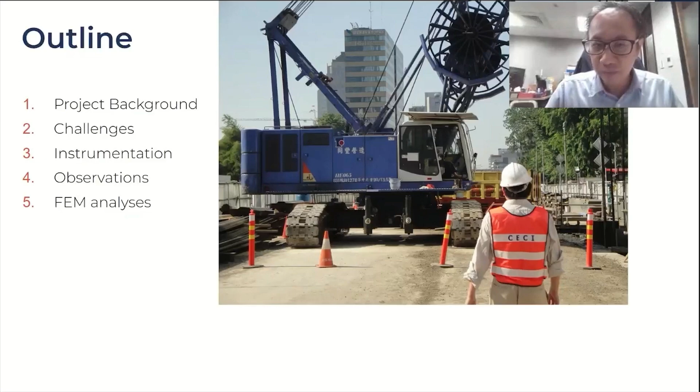Now I want to very briefly explain the project background. Here you can see some photos which I took from the research project we have.

This is an excavation for underground stations in phase 1 of the Jakarta MRT North-South line, which has 6 underground stations. The station we talk about, called Bunderan HI, is one of those 6.

This Bunderan HI station is just beneath this roundabout. It's located in Bunderan HI at central Jakarta in Indonesia, and it's one of 6 underground stations in phase 1 of the north-south line of the Jakarta MRT.

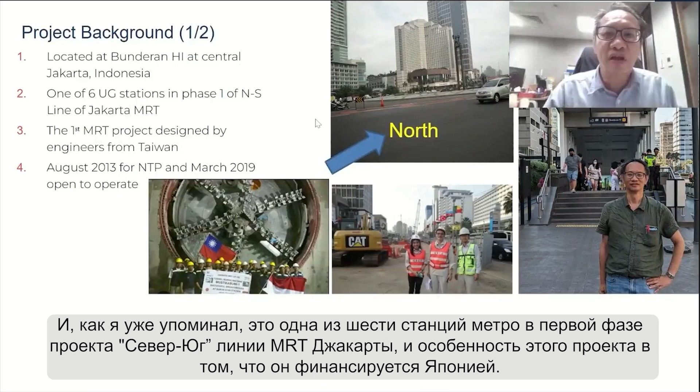A very special thing is this project is a Japan-funded project, but in addition to the tier 1 contractor which must be Japanese, there's local Indonesian contractors. Many subcontractors or even the consultant actually come from Taiwan, so this is the first MRT project designed by engineers from Taiwan.

That's the reason why, when we had a TBM breakthrough, we could raise our national flag together with the national flag of the Republic of Indonesia, because we did have many Taiwanese engineers working there for this project. That's me, that's my client Mr. Moda from the contractor side, and my assistant engineer.

The whole project started design from August 2013, the so-called notice to proceed (NTP), and in March 2019 the whole project opened to operate. This was a photo I took last year, 2023, at the entrance of the Bunderan HI station. You can see now it is in operation.

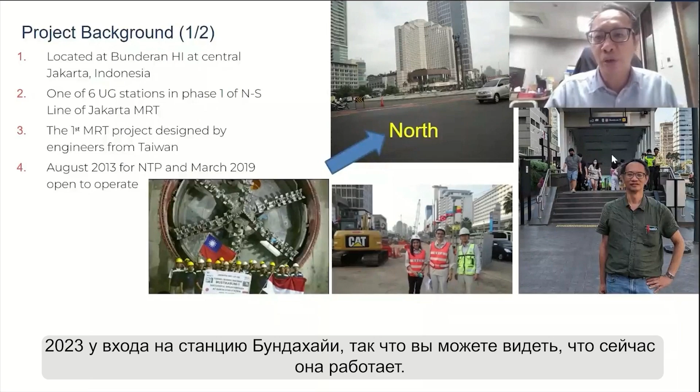I'll continue to give some further information about the project. As you can see from the photos, this excavation has 2 parts. The length of the excavation was 430 meters, and the width is around 22 to 30 meters in different sections, including 1 crossover tunnel and 1 underground station.

For the excavation, as you can see from the cross section of the ground profile, we used the so-called top-down method, which means we have a retaining structure, and once we excavate, we simultaneously cast the concrete slab to make horizontal supports. So the whole excavation was done in 5 excavation stages, supported by 4 levels of reinforced concrete slab with various thickness.

The maximum excavation depth is around 18 to almost 19 meters, and the excavation pit was retained using a 1 meter thick and 24.1 meter deep diaphragm wall.

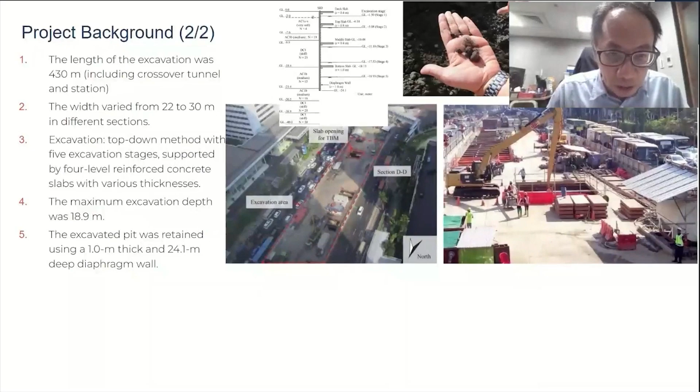The interesting thing, if you look at the ground profile, is it's mostly clay. One thing you may note is the penetration depth of the wall is comparatively shorter, only about 5 meters. The main reason is we realized the soil is quite stiff, so that's why we could have a comparatively short wall for this excavation.

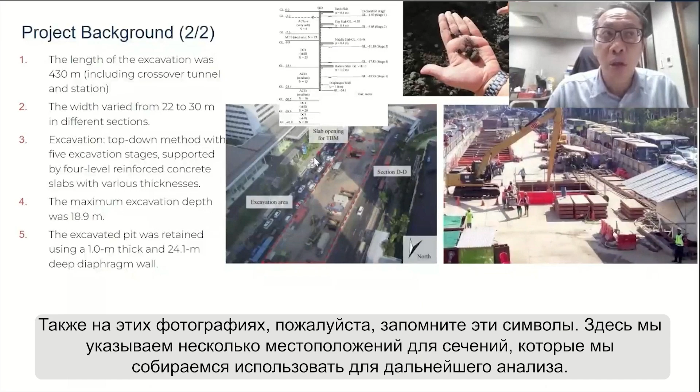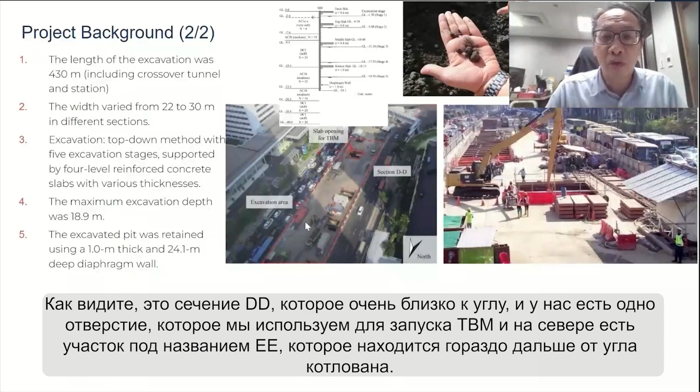Also from these photos, please remember these symbols. We indicate several locations for the sections which we are going to use for later analysis. As you can see, that's section DD, which is very close to the corner, and we have one opening which we use for the launch of the TBM. Going north, there's section EE, which is much further away from the corner of the excavation.

It's very important to prove what the behavior of the excavation looks like, and an important matter is what instrumentations you put on the project site.

Actually, I think the wording here should be challenges instead of instrumentation. The challenge in this case is that this was the first large underground excavation project in Jakarta, so there was no similar experience we could refer to in the same area, including absence of local knowledge and understanding of the soil information.

There's also reliability issues with data for both soil testing and monitoring. This is a result from a consolidation test, but I don't think the data here can tell you much, because as you can see, it only has a primary consolidation curve. It doesn't have the unload-reload curve, so you won't be able to interpret any swelling index to calculate the consolidation analysis.

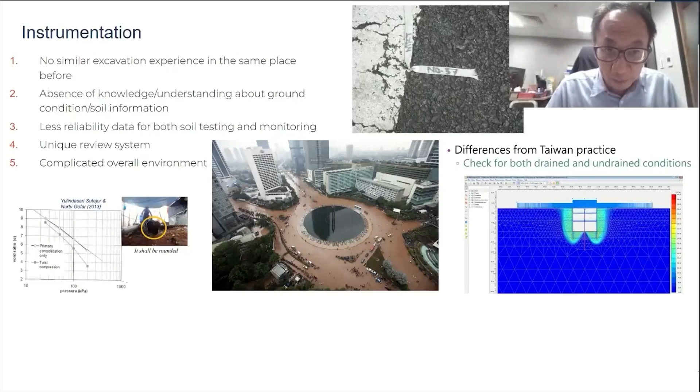You can also look at the samplers here. This is the tip of the sampler, and it should be a rounded one, but as you can see from the photos, it's completely twisted, which means the ground is much stiffer, but they just tried their own way to put the sampler in. This kind of twisted tip, we believe, caused a lot of sample disturbance, which could reduce the strength of the soils from the testing. So that's what we call the unreliable soil data.

And here shows the settlement nails which we found from the ground survey. As you can see, this kind of settlement nail system cannot give you very reliable data for surface settlement measurement. That's the reason why, in the end, when we did the feedback analysis, we tried to ignore all the settlement data and only took the wall deflection result to do the feedback analysis.

And it has a very unique review system, where the comments given by the review panel are not consistent with what we learned in the past, whether in theory or engineering practice.

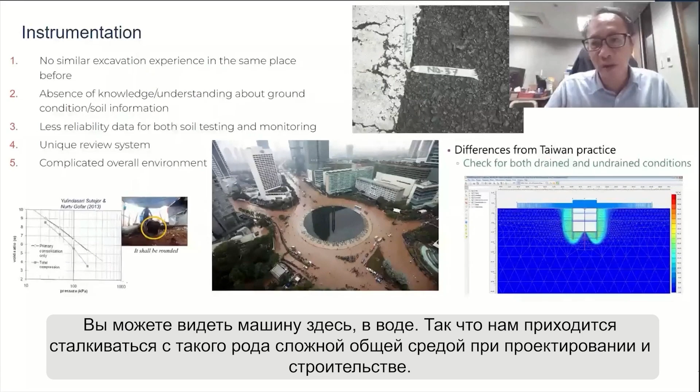Again, the very complicated overall environment we have to face is also a challenge to us. As you can see from the photo at the bottom center, that's the Bunderan area, and the whole area was flooded - you can see the car here is all in the water. So we have to face this kind of complicated overall environment when we do the design and construction. This indeed caused a challenge to us.

Now, the title here should actually be the instrumentations. The instrumentations we put here include inclinometers in the diaphragm wall, strain gauges in the diaphragm wall, strain gauges in the king post, and surface settlement nails on the ground behind the excavation, though I think the number is quite limited.

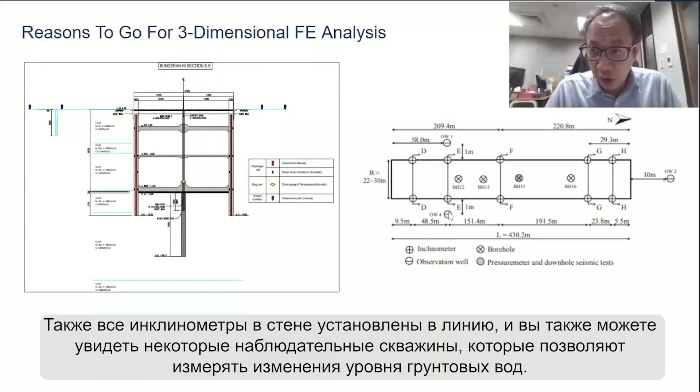This one on the right is the plan view. You can see the inclinometers in the DD section, EE section, FF, GG, and HH - totally 5 sections. The EE section is much further away, around 60 meters from the corner, and the DD section is much closer to the corner. The inclinometers in the wall are all in pairs, and you can also see some observation wells which measure the change of groundwater level.

Now I want to talk about what we saw from those observations, from the inclinometers. We first look at the inclinometer installed at section EE, around 60 meters from the corner of the excavation. Starting from the left, that's the first excavation, and the shape of the wall deflects like a cantilever mode. Gradually, once we excavate deeper and install the slabs, it changes to the propped mode, just like this. You can find the depth with the maximum wall deflection is more or less similar to the maximum excavation depth. The maximum wall deflection is around 16, I think - the red line here is around 16 to 17 millimeters.

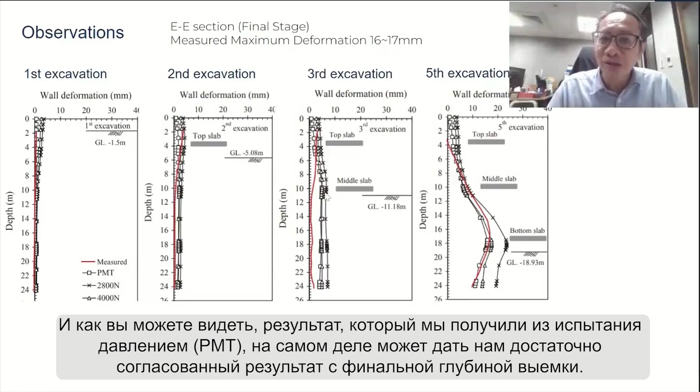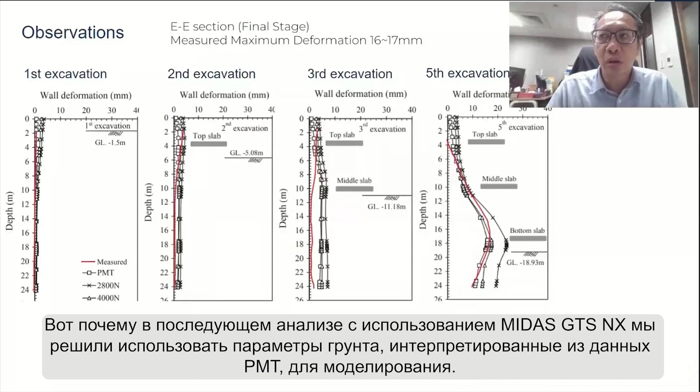Here we also tried some initial simulations based on different assumptions of soil parameters using other software, and then compared that with the observation data. As you can see, the result from the PMT, the pressure meter test, actually gives us a quite consistent result with the final excavation depth. That's the reason why, in later analysis using Midas GTS NX, we decided to use the soil parameters interpreted from the PMT for the simulations.

Okay, now we move into the finite element analysis, and that's we first talk about the models. Actually this model is only for an exercise purpose, so I personally will say this model is slightly, much bigger than what we expect.

Normally if the excavation length is only like 430 meters, we will add additional like 2 times of the maximum excavation depth, which will be like 40 meters each side, which should be enough. But we use much larger models to do the analysis this time. The length of the model is 1,000 meters, and the size 500 meters. But if you use a smaller size model, you can save the time you have for the analysis.

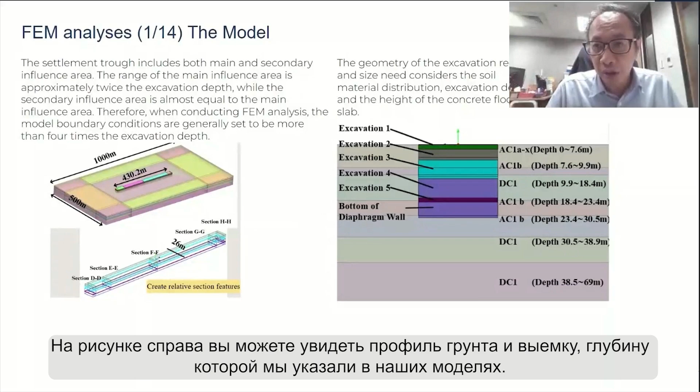We also mark where the sections which we are going to compare later on: D, D, E, E, F, F, and G, G, H here. And for the figure at the right, you can see the ground profile and the excavation depth which we put in our models.

Again, in midas GTS NX, it has a very special feature, which is different from others: we are eligible to manually define the mesh you are going to use, and then combine them together. We call that hybrid mesh. Normally in other similar software having similar functions, the mesh which you have mostly only has some limited options. But in midas GTS NX, you can manually change the size of mesh.

For example, we use several intervals of the mesh. Near the excavation area, we use a 1 meter interval to define the mesh size, because that's the area which we need to pay more attention to. But for the place far away from the excavation, we will use a much larger interval, like 15 meters, and then we combine these two sizes of mesh together. We use the hybrid mesh function in the software.

So that's the mesh which we have when we do the three-dimensional analysis using midas GTS NX, and that's a very special feature this software has.

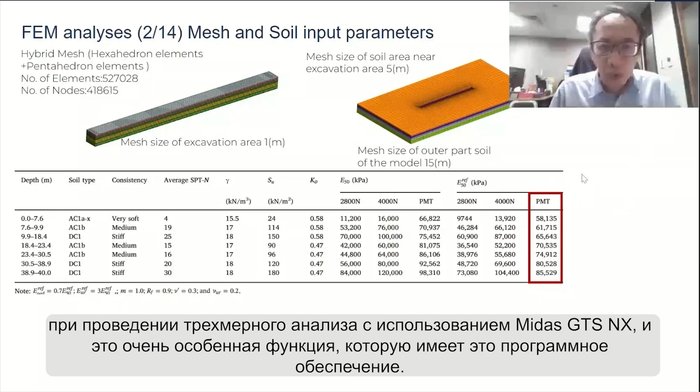We just mentioned we use the parameters from the pressuremeter test to do the simulations. Talking about the constitutive models which we use in these simulations, because this is a stress relief case for excavation, we choose a constitutive model in midas GTS NX called the modified Mohr-Coulomb model.

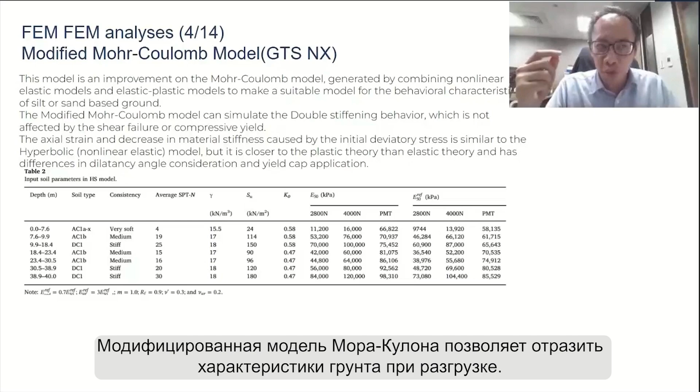The modified Mohr-Coulomb model is eligible to show the characteristic of the soil for stress relief, and this will be more similar to what we have in reality. These are the parameters we used for the analysis.

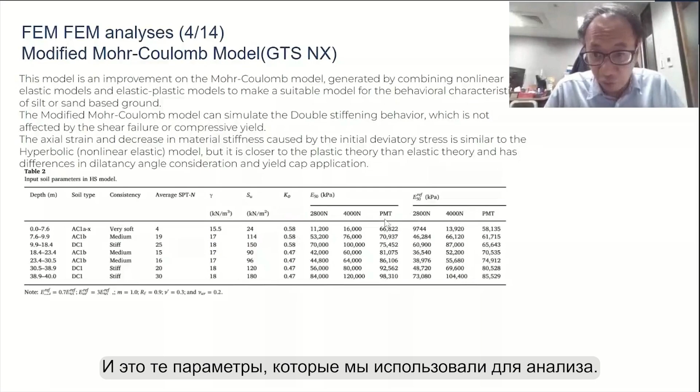After explaining the constitutive models which we use for the soils, we now move into the structural part. Because this is a top-down case, the structural members which we need to have in the excavation include the retaining wall, which is the reinforced concrete diaphragm wall, and the floor slab.

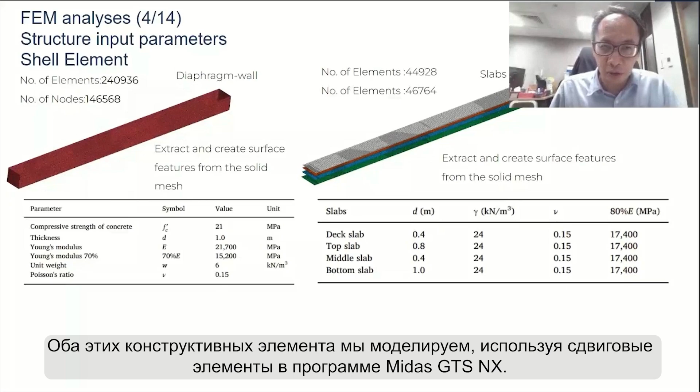Both structural members use the shell element in midas GTS NX. And for the shell element, because that's a kind of elastic material, what you need to give is basically the strength - the Young's modulus, unit weight, and the Poisson's ratio. That's what we use for the structural members.

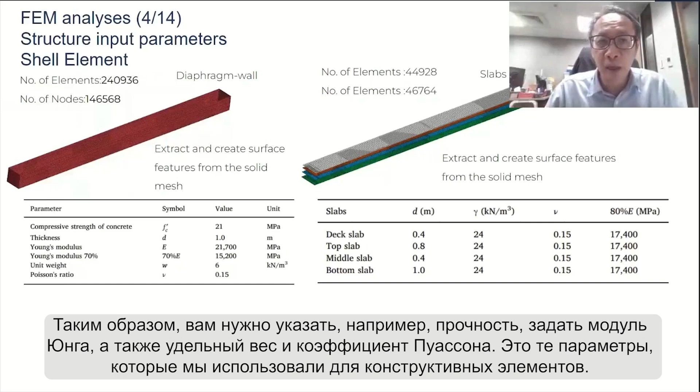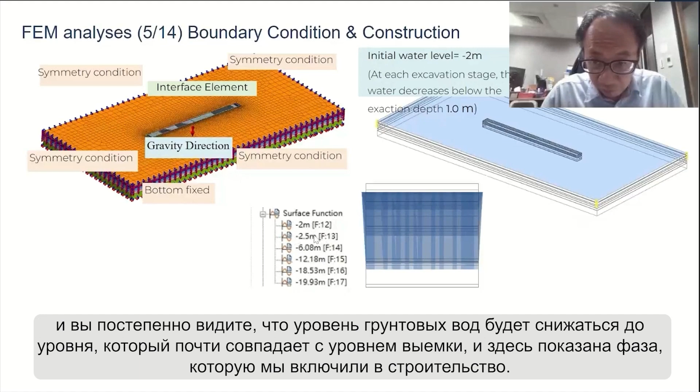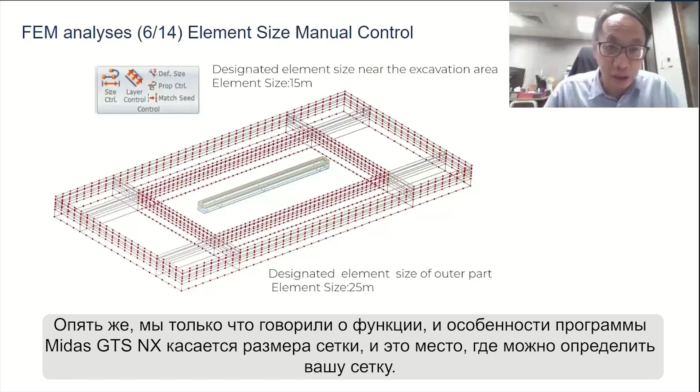Here is the phase which we put into the construction. Again, we're talking about the special feature of midas GTS NX regarding mesh size, and this is the place where you can define your mesh. This slide shows some element sizes in the models.

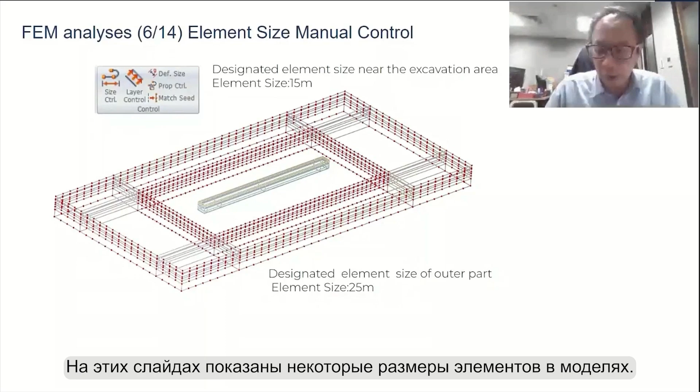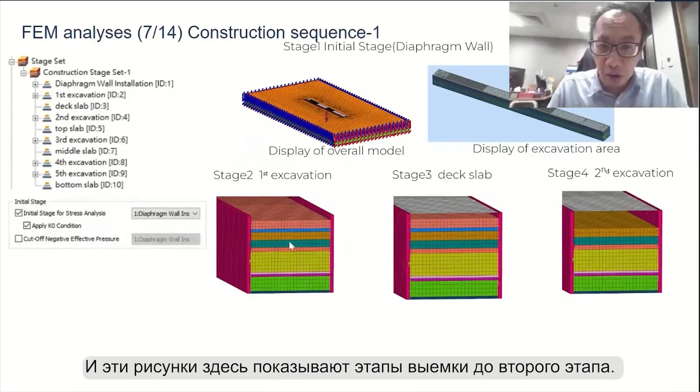You can see we'll start with the diaphragm wall installation, and then - but in this case we have a wished-in-place case, which means the diaphragm wall installation did not cause any displacement. Then we go stage by stage: you'll have the first excavation and then put the deck slab in, and we try to put all the construction phases into here. These figures show the excavation stage up to the second excavation.

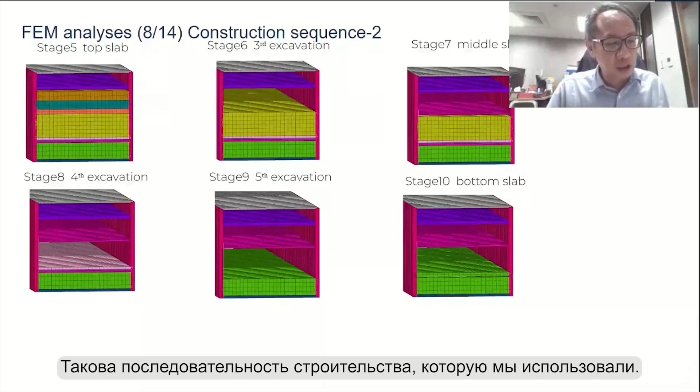Continuing from the previous page, we have stage 5, top slab, up to the final stage, which is the casting of the slab. So that's the case which we have for the construction sequence. Now we look at the result which we have - the blue one is the simulation, and the red one is the monitoring data.

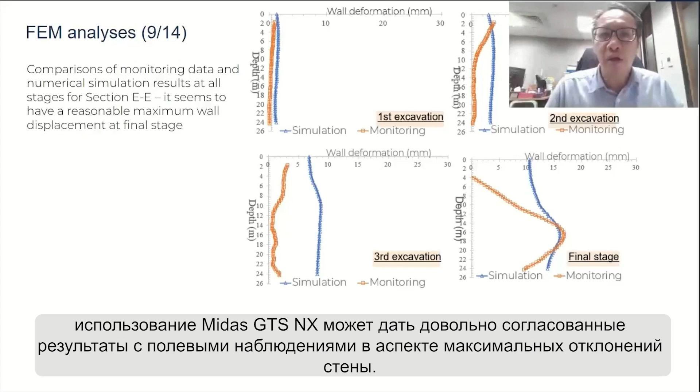We use section EE as an example, starting from the first excavation up to the final stage. If we're talking about the maximum wall deflection at the final stage, using midas GTS NX can give a quite consistent result with the field observation in terms of maximum wall deflections. But very obviously, it looks like the simulation overestimates the deformation above the ground levels.

We consider this is very likely due to two reasons. One, we may have to change the input of the structural members, especially like the slab. The other reason is probably we should consider the time effect, the time-dependent behavior of soil, which we don't consider in our current analysis.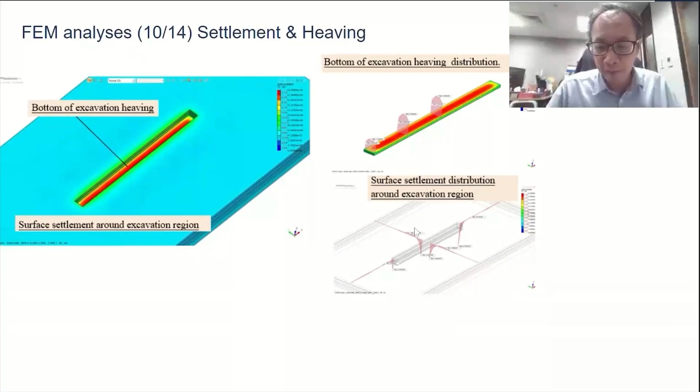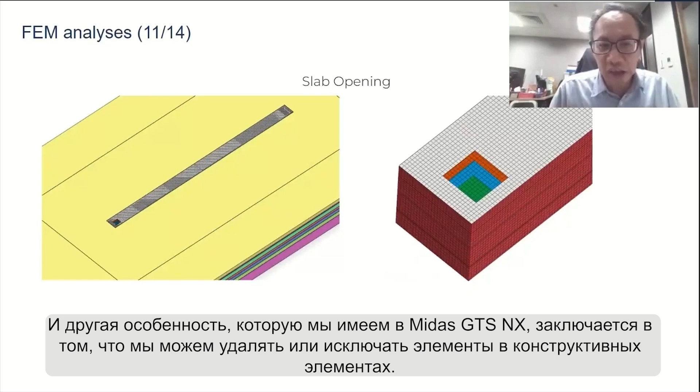The other feature which we have in midas GTS NX is we are eligible to remove or delete the elements on the structural members. If you remember, we have an opening on the slab. So what we're going to do now is show how to remove some elements on the slab and see how it works, and how it affects the simulation result which we have.

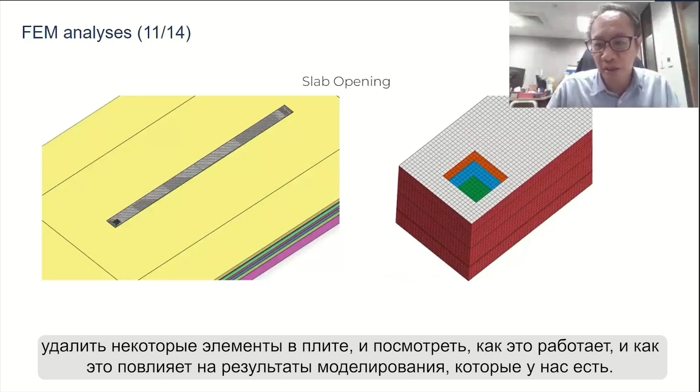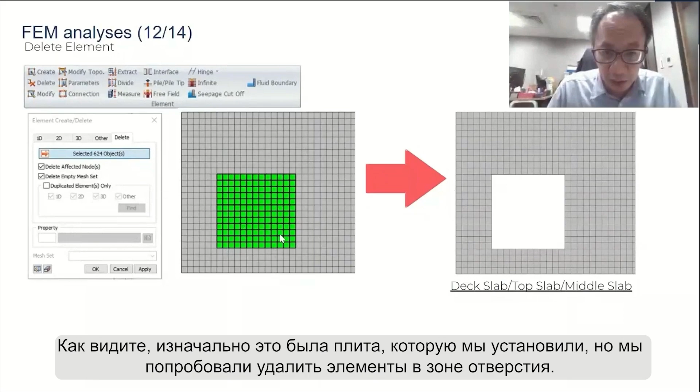That's the place where you can assign how to delete elements in the structural members. Originally that's the slab which we put in, but we try to remove the opening elements there, so you get an opening on the slab. As you can see from the photos here, that's an opening on the slab, and the dimension is 12 meters by 12 meters. So we just copy this opening into the model.

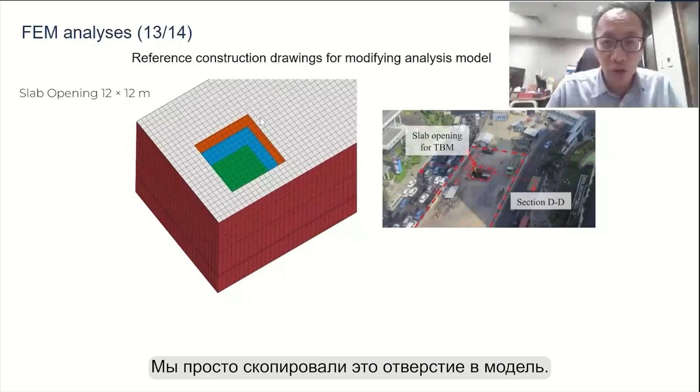On the left one, we do have openings there. So we try to compare the results for section HH, which is in a corner but without any opening, and section DD, which is also close to the corner of the excavation but with openings there. I just mentioned the maximum wall deflection at the end from section EE is around 16 to 17 millimeters. But if you look at section HH, it's less than 10 millimeters. We believe the corner effect of the excavation significantly reduces the wall deflections.

That's the reason why we have much smaller lateral wall displacement at the place near the corner. But if you look at section DD, the displacement became much larger. From the field monitoring, it's even more than 20 millimeters, and we believe this could possibly be caused by the opening in the slab.

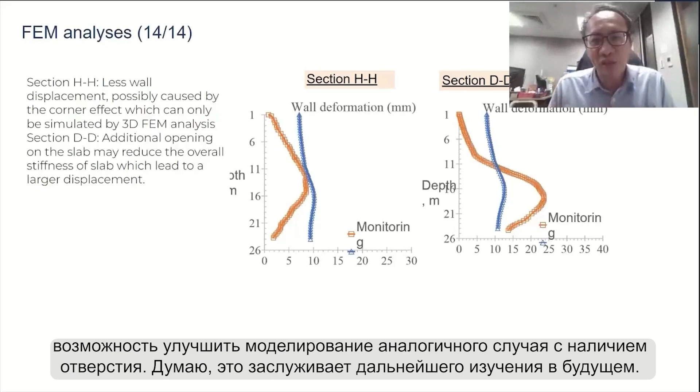But even though we tried to remove the elements on the slab in order to make an opening on the slab, it looks like we still have space to improve, to simulate the similar case with an opening. So I think this deserves some further study in the future.

Okay, that's the end of my presentation. Thanks for listening. Thank you.